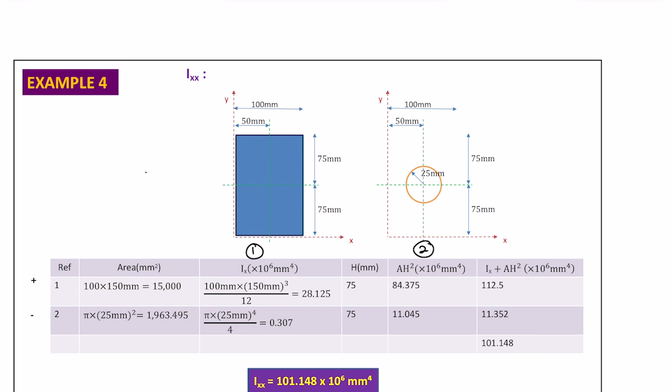First, we need to calculate the inertia for the rectangle. Calculate the area first, 100 mm and 150 mm. And calculate the Ixx. The formula for a rectangular section, kita dah biasa pakai, is BD cube divided by 12. Here, I call it I bar X because kita tak campurkan lagi dengan the value of AH square. So, dia jadi I bar X.

Then we can calculate the inertia for the rectangle. The B is 100 and the D is 150 power of 3, divided by 12. And divide it by 1 million to put it in the form of times 10 power of 6. You will get 28.125.

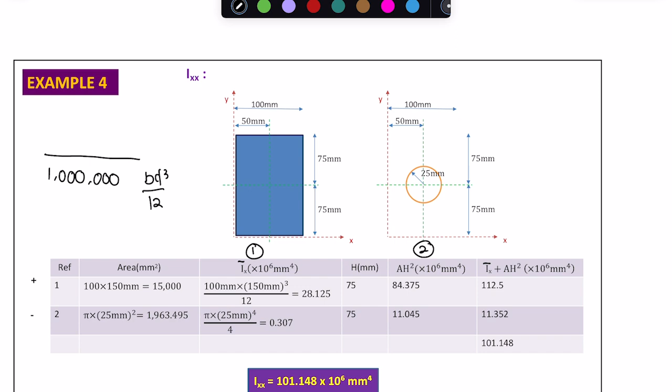Next, we're going to get the value of H. Sebab di sini ada H. Bila you tengok, value H ni depends on the type of section's shape. Here, this is a rectangle. So, according to the formula here, the centroid of a rectangle memang dekat tengah-tengah. Kalau dia ambil dari centroid, it is BH power of 3 divided by 12. Same goes dengan Iyy dia. So, H dia akan jadi dari the centroid to the axis yang you refer.

Because in this one, dia minta with respect to the x-axis, you have to get the value of H. H dia adalah 75 from the centroid to the x-axis. Then get the value of AH square, 75 power of 2 times 15,000, divided by 1 million. You will get 84.375 times 10 power of 6. The same process, tambah aja the AH square with the I bar X. You will get 112.5 times 10 power of 6.

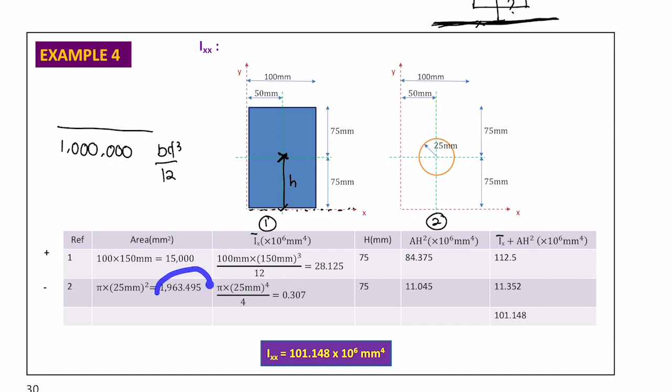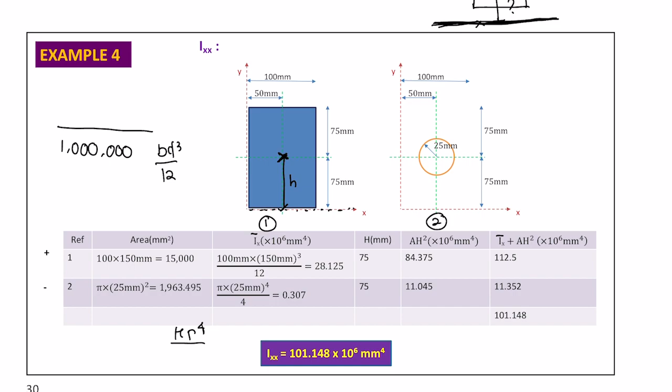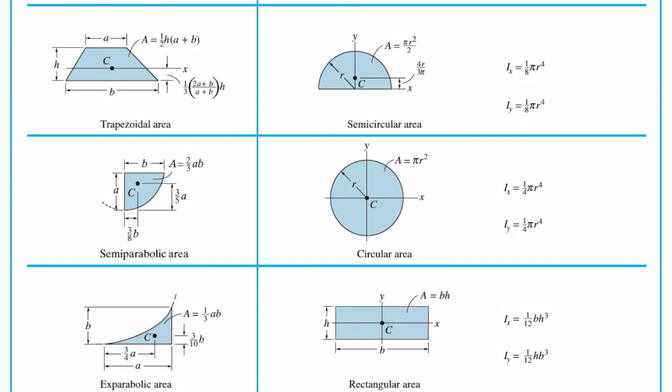Next, we look at the circle section, section number 2. Get the area. The area for a circle, formula dia adalah pi r square. Then pi times 25 power of 2, you will get this value. For I bar x, the formula for Ixx for the circle is pi r power of 4 divided by 4. You can refer to the formula here. Sama juga dengan Iyy dia, pi r power of 4 divided by 4. After you calculate, you will get 0.307 as the value. Kena bahagi dengan 1 million ya, baru dapat value ini.

Next, we're going to calculate the h for the circle. The formula pi r power of 4 divided by 4 ni adalah inertia from the centroid. Jadi centroid ni kita perlukan h dia sebab ada jarak ya di sini. And obviously the value is 75. 75 power of 2 times 1963.495 divided by 1 million, you will get 11.045.

Since this is the hollow section, you have to minus: 112.5 minus 11.352, you will get 101.148 times 10 power of 6.

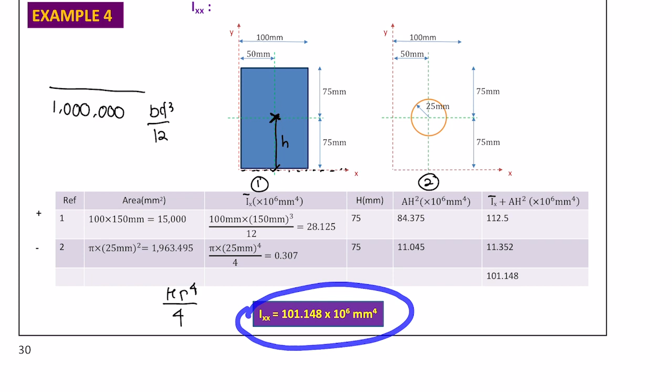Look at Iyy. For Iyy, it's similar. The area you can just copy from above. Then we can calculate the I bar y. The formula for the rectangle is DB cube divided by 12. 150 is the D, B is 100, cube, divide by 12, divide by 1 million. You will get 12.5 times 10 power of 6.

Next, we need to find the value of h since the inertia formula ni adalah from the centroid. So the centroid kena pergi ke the y-axis here. The distance is 50 mm. So h is 50, power of 2, multiplied by 15,000, divided by 1 million, you will get 37.5.

And AH square plus 12.5, you will get 50. For section 2, which is the circle, the I bar y formula sama macam Ixx ya. Sebab apa dia sama? Sebab dia simetri. Jadi mana-mana arah pun dia sama saja. Pi r power of 4 divide with 4. So replace the radius ni dengan 25 power of 4 darab pi and divide with 4.

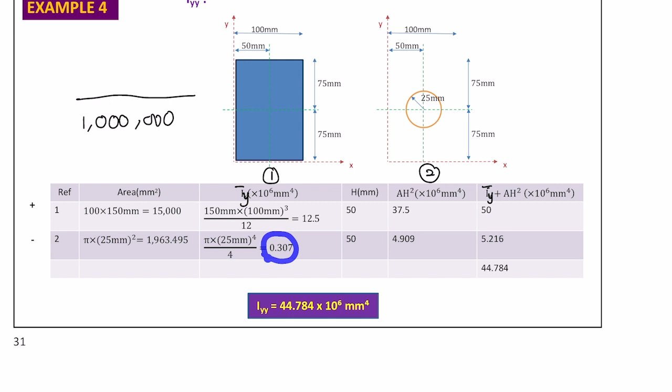The values divide with 1 million, you will get 0.307 times 10 power of 6. The h will be from the centroid of the circle to the y-axis. It is 50 mm. So 50 mm power of 2 times the area and divide with 1 million, you will get 4.909 times 10 power of 6. 4.909 plus 0.307, it is 5.216. And remember, this is a hollow section. 50 minus 5.216 equal to 44.784 times 10 power of 6 mm power of 4.

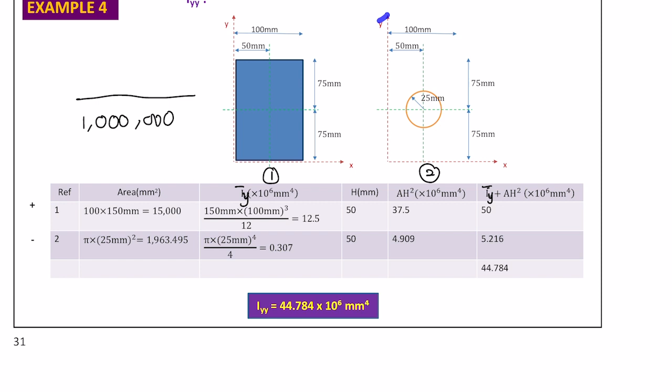So that is the value of Ixx and Iyy if the question asks you to find it to the axis y dan x yang bukan dekat centroid ya. What if, from the same example, the position of x and y axis are moved as shown in the figure? So, kita kena find the inertia when the y axis and x axis is moved at the center of the figure here. Obviously, kalau you tengok dalam gambar ni pun, you tahu this x and y axis is located at the centroid of this figure because everything is symmetry. X axis dia symmetry, y axis dia symmetry. So obviously the centroid memang dekat tengah-tengah.

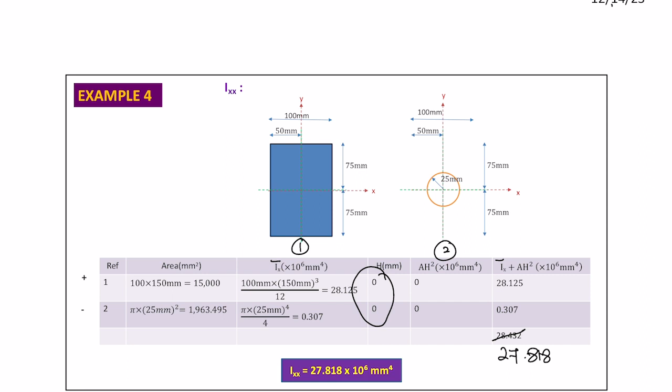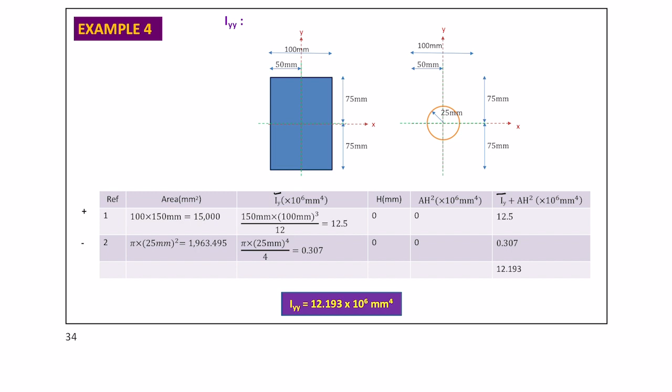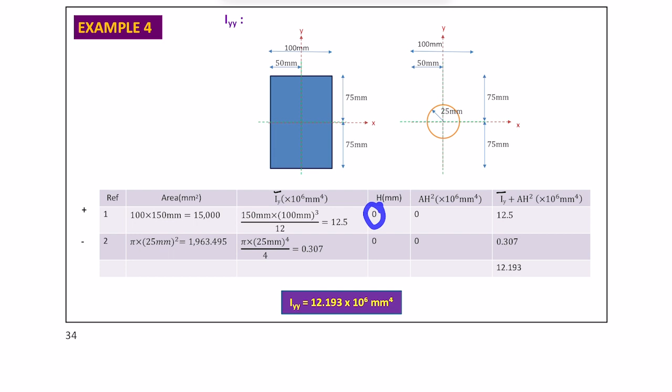For Iyy, similar the area and the I bar Y, like previous, because section kita masih sama. The difference here, the value of H. Sama juga because the centroid of the rectangle is exactly at the same point as the y-axis here. So H dia adalah kosong. Same goes with the circle section. Section number 2, it is exactly at the centroid of the circle. Comes 0. So the value of I bar y plus AH square going to be 12.5 times 10 power of 6, and the value of the second section is going to be 0.307. So this value minus the hollow round section, you will get 12.193 times 10 power of 6.

That will be all for example number 4. Hopefully you get the idea how to calculate the IXX and IYY if the axis of y and x are not exactly at the centroid of the section.